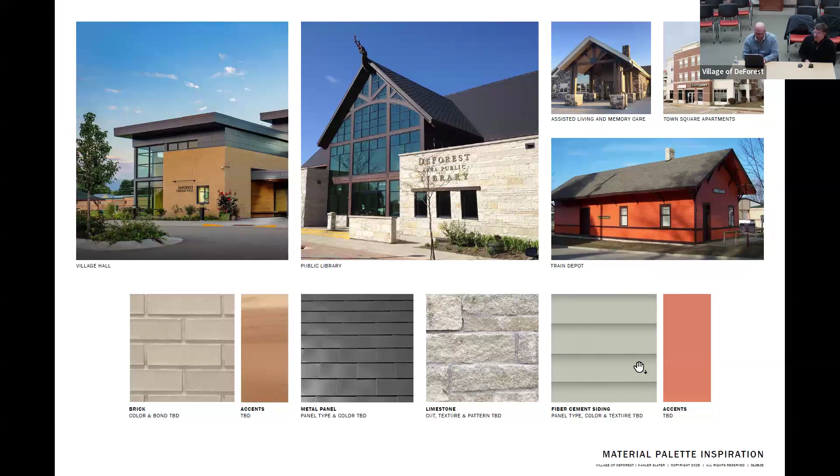We started out looking at what some of the built fabric here in DeForest suggests as far as a preliminary approach to a material palette. We found a couple of really great sources of inspiration there—the Village Hall being one, the public library being another. And then there was a suggestion in the prompt for us to look towards the assisted living and memory care building and the town square apartments as additional contextual references to be compatible with.

And then finally, doing our own look around town, the train depot struck us as a great historic structure that there's a possibility to kind of reference in some of the things we're doing, potentially with color, potentially with how we're detailing roof edges, or even just architectural style compatible with the library, the train depot, the assisted living. They all have these kind of articulated roofs and brackets and things like that. So we've taken that to a level of interpretation here with the example palette below—there's a lot to determine about color and pattern and dialing all these things in specifically, but this is a starting point that we thought was pulling from the context successfully.

So we've got some brick, we noticed that there's some wood accents—for example, in this building, that could be a nice thing to bring into a residential building. Metal panels could reference some of the shingle textures that we see in some of this architecture, or could come from a different place. Limestone is always a nice, strong contextual material. And then a lot of residential buildings have fiber cement siding on them, which can take the form of many different patterns, textures, and colors.

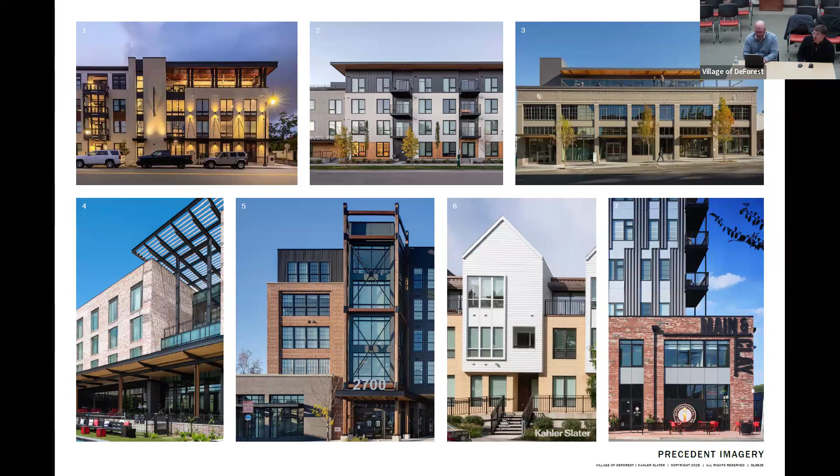We also pulled in some precedent imagery here that looks at a 3/1 or maybe a 4/1 building. These images approximate the scale we're anticipating for the project, and look at how they break down their scale successfully, so this building isn't a towering 4-story or 3-story project. It's a sensitive 3-story project that at times looks like a 2 or 1-story project, with some of those articulated roof edges that I mentioned in the precedent analysis.

Some of these buildings step forward or create a separated presence for the retail portion of the building, like image number 5 or image number 7. We like that as well. We thought that was a strong way to give this some character and scale.

These also use materials like brick, stone, and metal panel. It's a mixture of materials, not one mono material. We felt that's probably going to be important to successfully breaking down the building's scale as well.

We also included one image of a project Kahler Slater designed, an apartment building that has some direct townhome entrances along its street. We thought that may be an interesting way to respond to the context here and make this feel like it's part of the neighborhood.

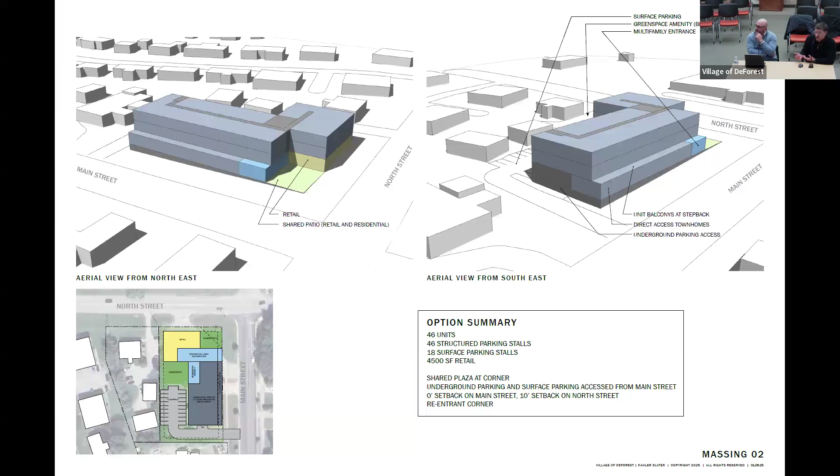We're also showing some potential for direct entry units along Main Street there, whether those are actual townhomes or more like flats with a secondary entrance. The project we referenced earlier also has that corridor entrance, but with a secondary out front. That could be an actual entrance with steps, or just a patio that gives the appearance of a townhome.

This is the second version of massing number 2 with the third parcel. We again extend that L and are able to wrap some of the parking around the rear of the building and enlarge the green space that residents would have access to, so it's not so tight on the site.

This one achieves 60 units. So that's a key thing about these 3-parcel solutions: they're able to achieve the required density.

Here's a comparison of these plans, so you can see the difference in the layout. And then we've also got some images here comparing the 3-dimensional renderings.

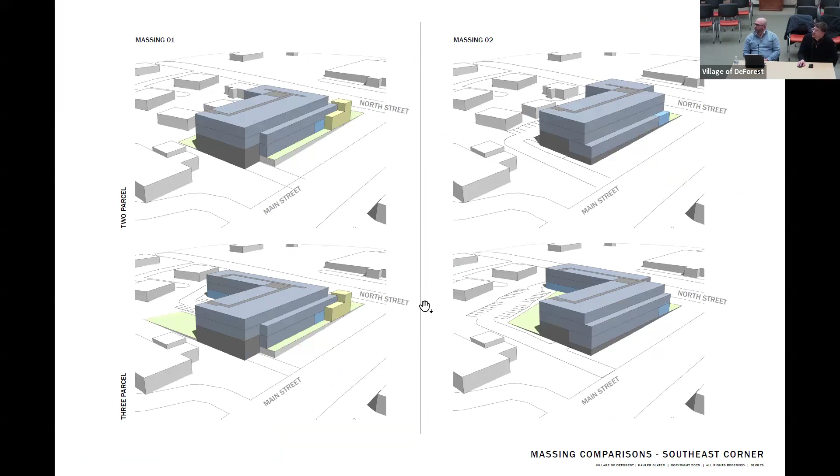Wow, since last Friday, I'm impressed, guys. I can't even pick new fabric for my curtains in that amount of time, so that's great.

So, questions, Rebecca? Is there any possibility of getting that multi-family place, or are they still wanting way too much? There is a possibility, 100%. We'll be discussing that further in closed session. Okay, so we can tackle that then.

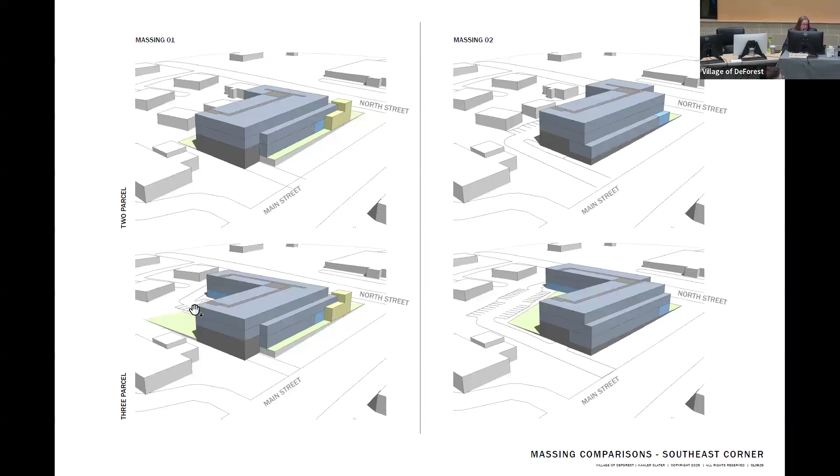The reason I ask is because of the 4 options you showed, the one with the drive all the way through, I really liked that for a lot of reasons. One, for emergency access, but also for the flow of traffic and people in and out. So fire trucks, the whole 9 yards. Any of them will be awesome, but that one seems ideal.

It's great to hear your feedback, and I think there are ways to create hybrids between the different options. If you like the through access, that can be incorporated in any of the options, other than the 2-parcel option, which gets a little tighter. For the 3-parcel option, either version, we can carry that through.

The big thing to think about as a group is how we're positioning the building. Massing 1 pulls away from North Street and Main Street a little bit, giving a buffer, but lets the retail get closer. Massing 2 gets tighter to North Street and Main Street. Both are good solutions, but they'll present themselves differently as your gateway or anchor into the redevelopment going down Main Street.

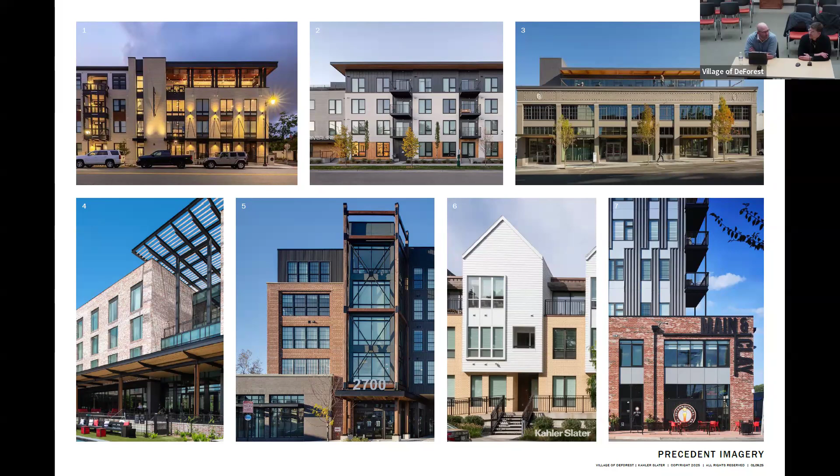If we go to those massing side by sides, I think massing number 1, where we have that retail element, I think we were talking in the office the last couple of days of, this is an element that can stand out and take some liberties architecturally, and can kind of be that transition between the industrial and what we're trying to set up with the residential scale and the townhomes that continue down Main Street. So we see that as a strong option to anchor the corner.

But that being said, we also like the re-entrant corner of the other option and really creating a public plaza that becomes a moment at your gateway down the Main Street redevelopment. So I think we like the options that we put out because they present different things and it can do different things for setting up your redevelopment in the future.

I do like that, I don't know if you call it a bump out. The other thing I like is if we're going to have commercial in the front on the entry levels, having parking there so people can get into the store readily without having to interact with a lot of the residents is probably a good thing for the residents, and probably for the commercial establishment as well.

As Joe mentioned, that possibility of some hybrids out of these options, developing a way to get a little bit more parking to activate the residential on Massing 2, so that it doesn't feel like you have to go behind the building to park successfully for that. We think there's a way we can do that too, so bring the best of both worlds together here.

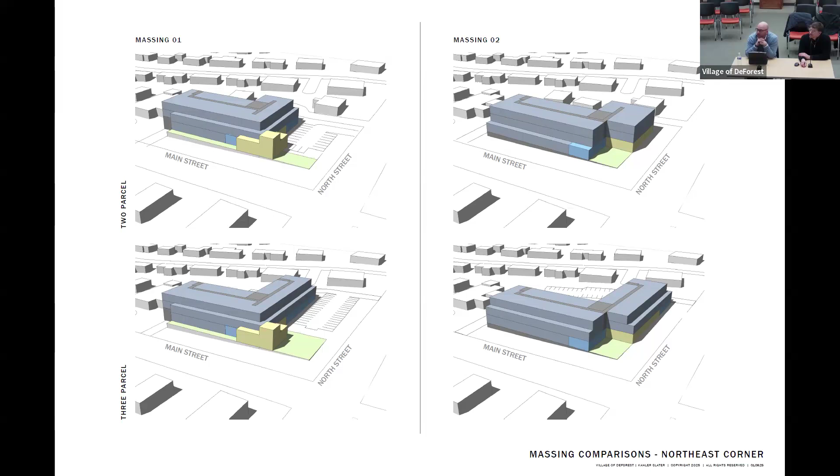It's just a thought. Yeah, and I think in the two parcel options, we're providing one stall for every unit underground. And then on Massing 2, it's really the retail parking that's less than ideal for the retail, but that would be the surface parking, while the resident parking would be all underground in the two parcel options. So I think that's important to note, as we look at this, the two parcel options, the resident parking is all accommodated under the building and just surface parking is meant for the retail.

And I imagine some guests, or for the residents. And then on both options for the three parcel options, we'll get pretty close to the amount of parking for the residents covered, but we will still have some surface. But all that surface parking, again, will be shielded by the building and kind of in the back. And I think we'll use that as a buffer to the other properties.

So we'll probably hold the western property line like we're showing with the parking, and then really create nice green space in the leftover space for the residents. So that'll be kind of really resident focused on the inside of the L and the back of the property.

Alex, where would the stormwater be accommodated? That's something that we'd probably have to dial into as we get farther along in this. Stormwater requirements for infill or for a redevelopment project like this are a little bit different than what they would be for greenfield. So I imagine that probably means less on-site that we have to have retained. But yeah, I don't know exactly how that looks.

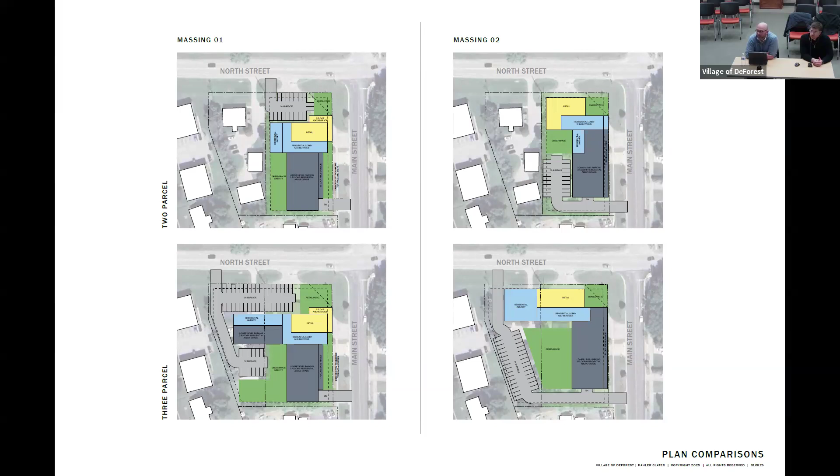There are considerations with who the residents are going to be. Elevators aren't perfect, they don't operate 100% of the time. And you're at 60 units, so maybe not quite enough to justify a second one, but from a convenience standpoint, it could be something to consider. But it is a fair amount of cost per stop. The other question I have, with that thought in mind, is that elevators don't always work.

We need to take into consideration how these people would get to their units, especially if they're in a wheelchair, if the elevator is not working. In that case, do we restrict people with wheelchairs only on the bottom floor, or do we allow them? You see where I'm going? Or do we have ramps built in? I'm just thinking long-term here and access, making sure that we have reasonably decent access, but at the same time, everything adds up money.

Yeah, those are all things we'll have to consider as we continue to design it, but we know that our current residents have a lot of those needs too, so we'll have to think about that. Although the advantage now is everything's on one floor. Yes.

Jay, do you have any thoughts? You're right in the middle of this and working with our residents every day.

No, I just think you guys are nailing it on the head with the questions you're asking. I was lucky enough to sit in on the meeting earlier this week. The days are scrambling together a little bit, but it's going to be a balancing act between figuring out what we can afford, what people want, and what we need. So I think Spence said multiple times, just get your opinions out so that when we get further along in the process, we can have things more dialed in.

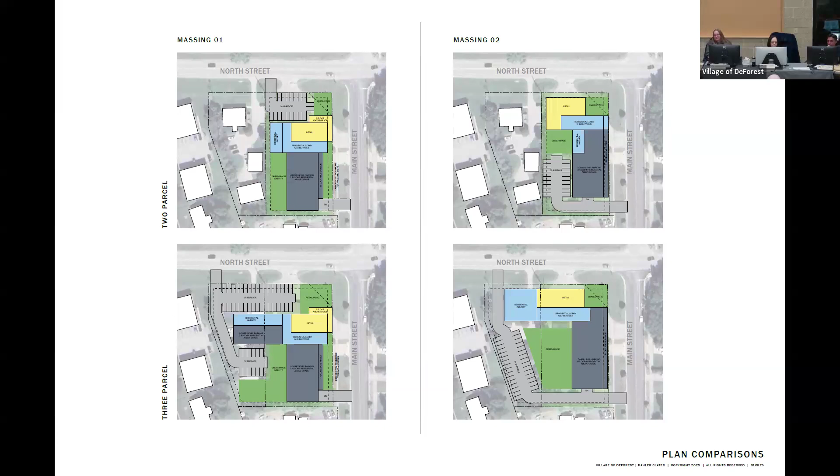Thank you. Thank you. Thank you. It's an amazing amount of work so far. Thank you. Do you have computers that generate these? Yes. It's a lot of work. Okay, thank you, thank you.

Item 7.3, resolution authorizing the chairperson and executive director to execute all necessary documents to acquire property located at 420 North Main Street, tax parcel number as indicated in the item.

Okay, I bet this is Alex again. Yep, this was in your packet. So there's a resolution in your packet which authorizes the issuance of a jurisdictional offer to acquire the property at 420 North Main. The amount, $272,500, shown at the bottom of the resolution, incorporates both the appraisal amount—the full appraisal was included in your packet, with the property appraised at $261,000—and the relocation amount for personal property, which was also included in the DOA-approved relocation plan. That was $11,500.